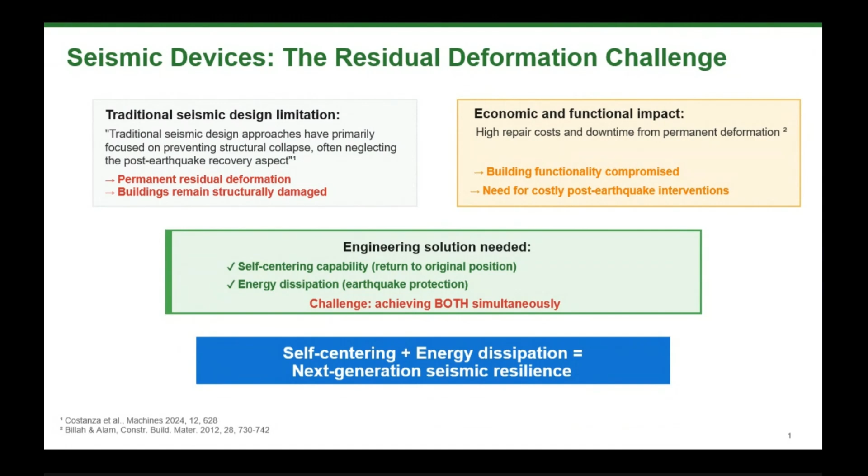post-earthquake intervention. So we need an engineering solution that can have self-centering capabilities, that is the ability of the structure to return to its original position, and energy dissipation to protect the building from the earthquake. So we need a new device that can face this challenge and overcome these limits simultaneously.

And shape memory alloys are one of the possible solutions to overcome these limits, thanks to their property, that is the superelasticity. The superelasticity, as you probably know, is the ability of the alloy to have large recoverable strains up to 8%, and return to their original shape upon unloading. And it is due to stress-induced phase transformation between the austenite, that is the high temperature and ordered phase, and the martensite, that is the low temperature phase.

This transformation of phase under stress makes this alloy have this flag-shaped hysteresis behavior when subject to stress. And thanks to this kind of curve, they have the ability to dissipate the energy during the loading and unloading, and to have self-centering capability, because we have minimal residual deformation after the stress-strain.

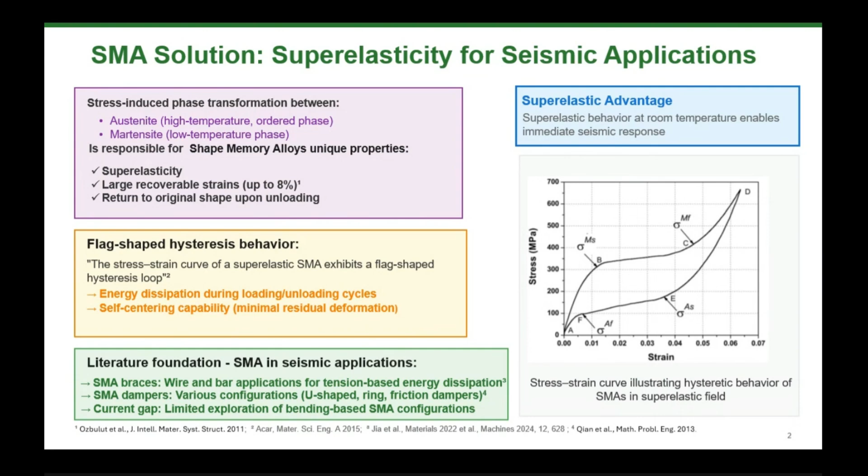So we used shape memory alloys to propose a new model of seismic joint. We built it. So as you can see, this is a model of joint, just to test, and it is made by two L-shaped NiTi sheets that work in parallel, one here and the other on the other side. And this was the first configuration that we statically tested, and we propose in this presentation.

Then we tried to test another configuration to make a comparison. That is this second one, that merges two NiTi sheets with L shape, this one, with these helical springs that are made of NiTi shape memory alloys.

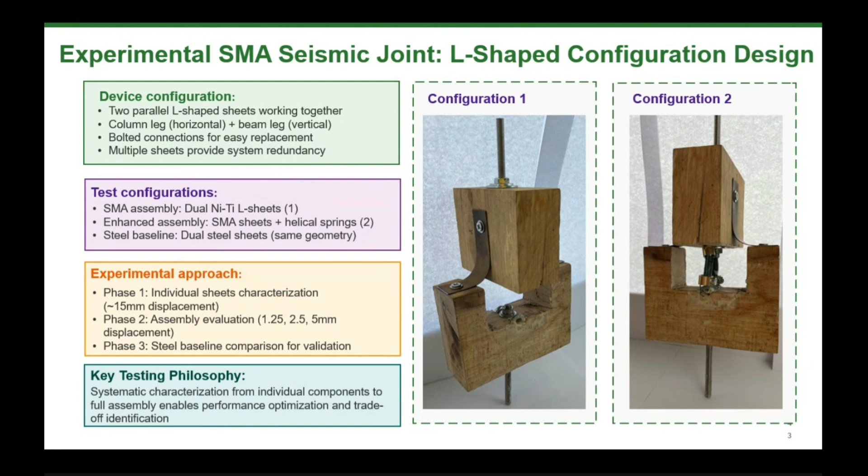And our experimental approach covered three different phases. First, we tested the single sheet. Then we moved to testing the first configuration of joint, then the second, and then we tested another joint that is like the first one, but with sheets that are made of steel, just to have a comparison between the common steel performances and the shape memory alloy ones.

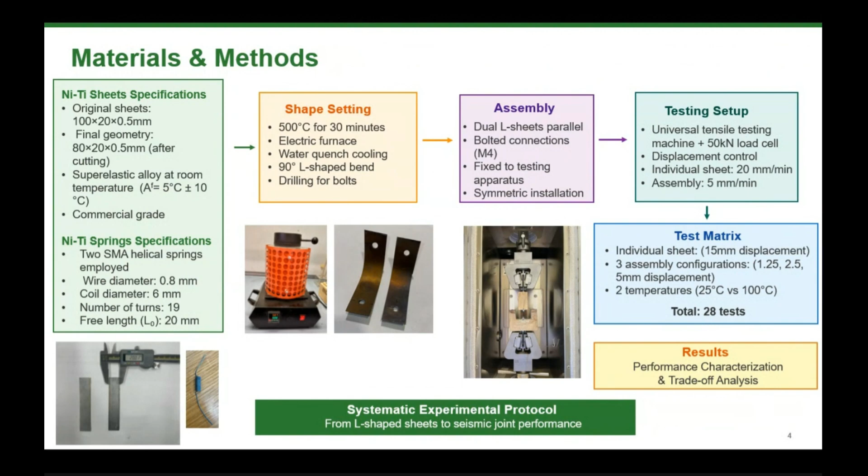So moving in detail to materials and methods, here you can find all the specifications of the material used, that are sheets here and wires. And you can see in particular that we use the superelastic alloy at room temperature. The manufacturer said that they had an austenite finish of 5 degrees Celsius. So we are sure that they are superelastic at room temperature.

And then the shape memory alloys and springs underwent shape setting treatment in a furnace, this one, the furnace of the laboratory, at 500 degrees Celsius for 30 minutes. And then they were water quenched to acquire this coil form, because they had no coil form. They acquired it through the shape setting heat treatment.

Then we drilled holes for bolt connection in the joint, and we tested the single sheets and the joint using a universal tensile testing machine equipped with a 50 kilonewton load cell, under displacement control. The testing rate was 20 millimeters per minute when we tested the single sheets, while the joint, so the assembly, was tested at 5 millimeters per minute deformation rate.

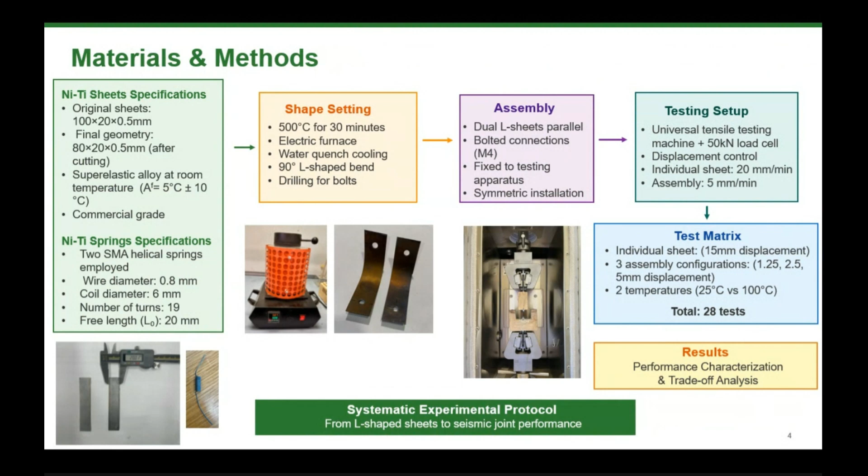The temperature of the environment, that was 25 degrees Celsius, and 100 degrees Celsius. Before talking about results, I show you one of the 28 graphs that we obtained from this kind of tensile testing. You can see how the sheets have the flag-shaped diagram with hysteresis loop, which we talked about before.

And here I reported the definition of the key performance indicators that we will mention after. In particular, as performance indicators, we use the peak force, that is commonly the maximum load capacity, the energy dissipation, that is simply the area of the loop, the stiffness, that is the very first initial slope of the force-displacement curve, and the volumetric energy density, that is maybe the most important parameter

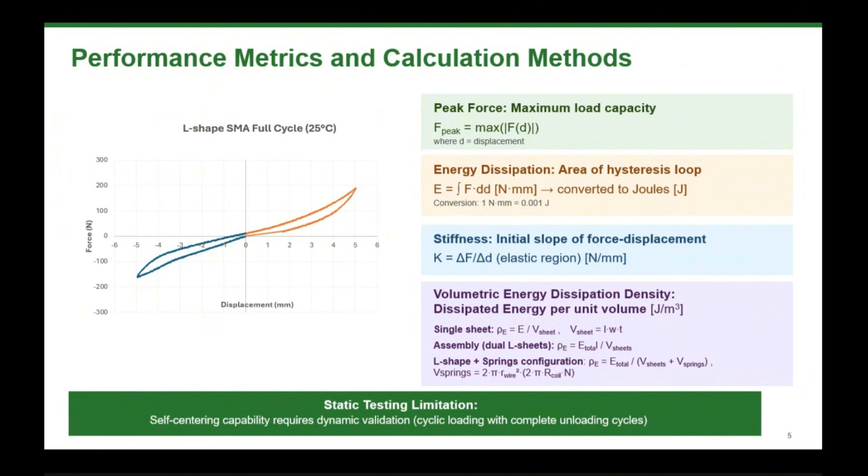to analyze. Let's note that all the tests were static tests, because we did it as a baseline, just to build the joint and to test the static parameters. So they are not dynamic tests, that will be made in a following validation test that we will do in the following days. What we found, let's talk first on the individual sheet characterization.

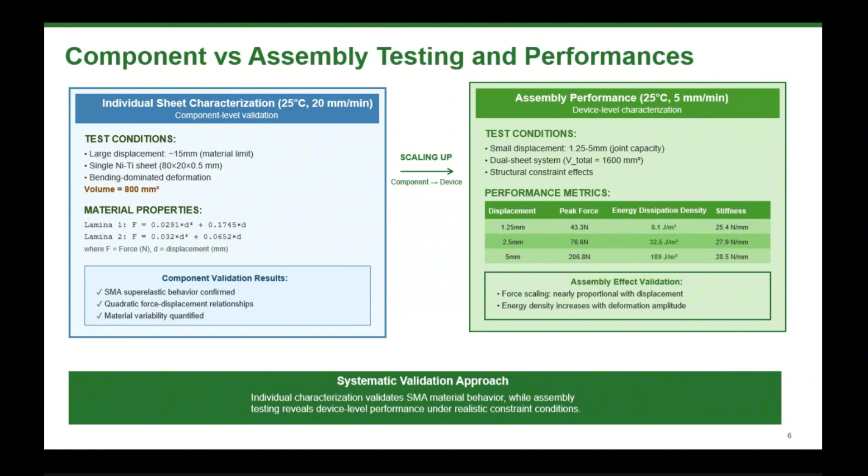We found these two experimental laws. I don't know if you are able to read, but I can tell you that we found that the sheets have a quadratic force-displacement relationship. So it's true that the sheets are superelastic at ambient temperature.

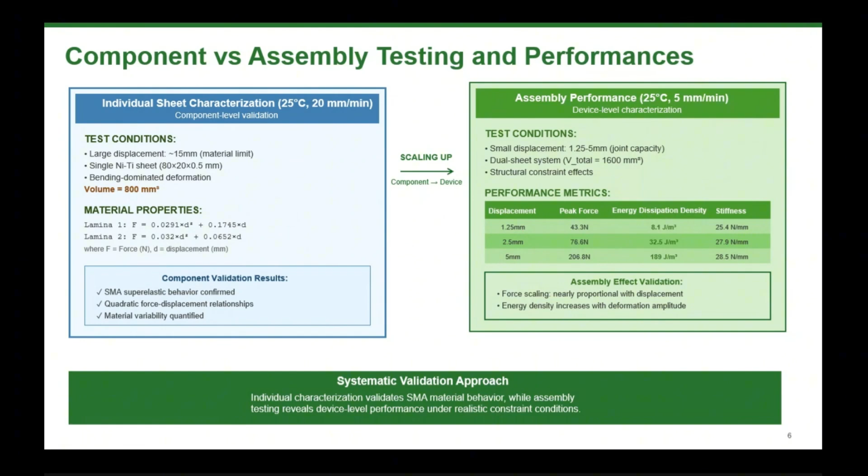Then once we characterized the sheets, we scaled up and moved to characterizing the assembly performance at ambient temperature and at 5 millimeters per minute rate. And what we found are the values reported in this table, that say that force scales near proportionally with the displacement, while the energy density increases more than proportionally with the deformation amplitude. So in this way, we had a very first systematic validation of the approach.

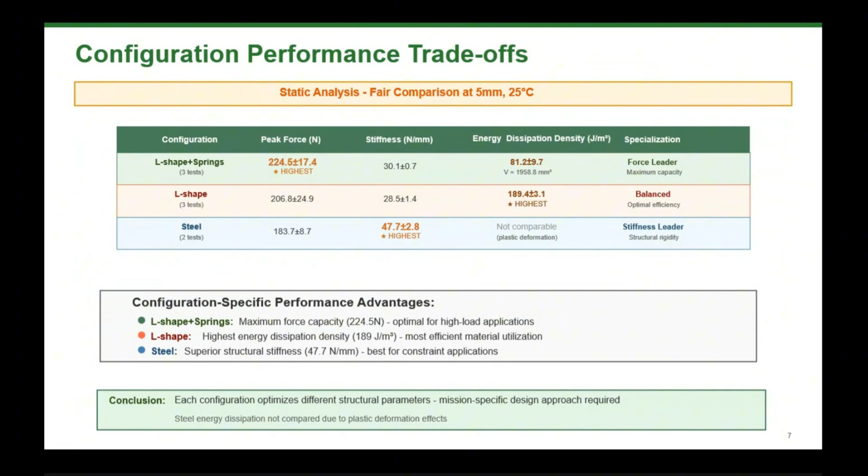Then we moved to comparing the performance results that we obtained for the three configurations mentioned before. In particular, we can find from the data in the table that there is no best configuration, but the optimum configuration depends on the application. For example, the second configuration, that is the L shape plus spring, is the force leader, while the L shape was the most balanced and steel, as we can imagine, was the leader on stiffness.

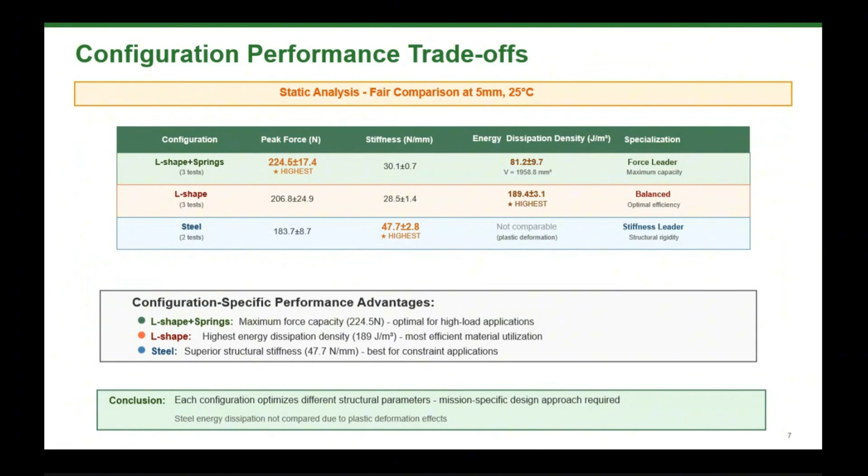So the conclusion from this very first test is that each configuration optimizes different parameters. So there is not an optimal one, but it depends on the application. And then we moved to a comparison on temperature, and we made it on the first configuration, that demonstrated to be the most balanced between the three.

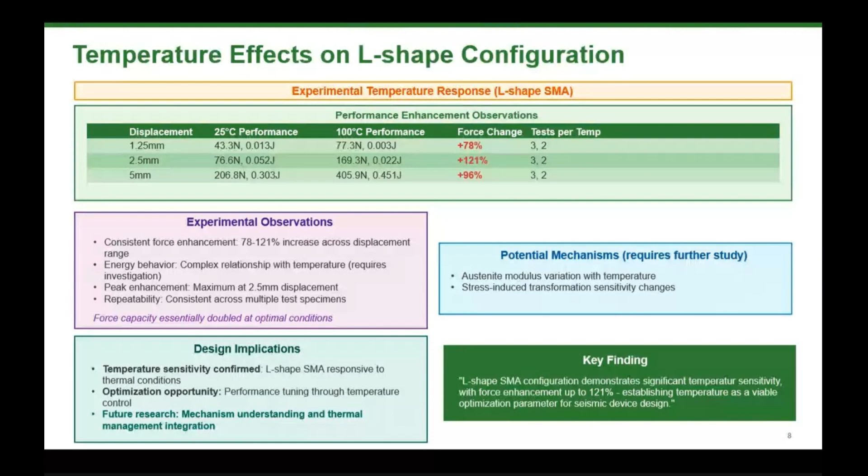And we found that this joint, as we know, is very, very sensitive to temperature, because we found a force enhancement up to 121% with temperature. So temperature is a parameter to take into account and to optimize for the next design of the final seismic device. So let's move to the conclusion.

In our work, we developed a very first prototype of seismic joint that exploits shape memory alloys as active part. And we made a very first static characterization of the single sheet and of the joint in three configurations through 28 tests and different temperatures.

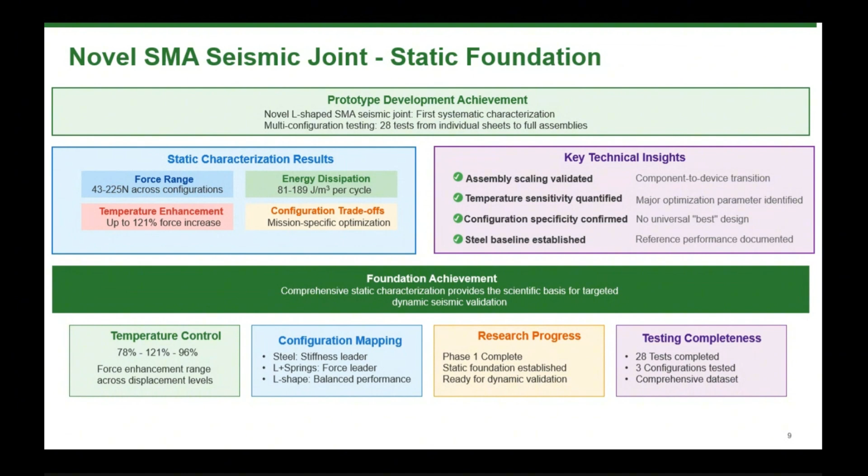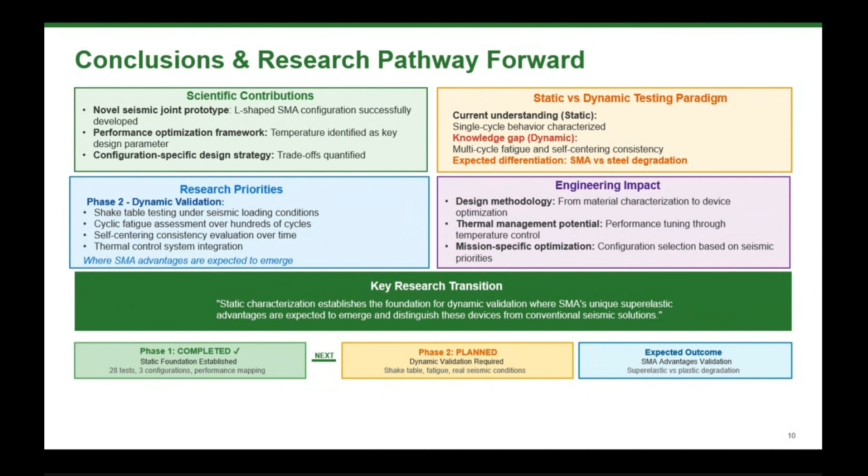And we set the base for the next phase, that is the most important one, that regards the dynamic validation of the seismic joint, using, for example, the shaking table or fatigue machine. These tests are planned starting from this month. So I hope in the near future to present all the results about the dynamic validation of the joint. Many thanks.